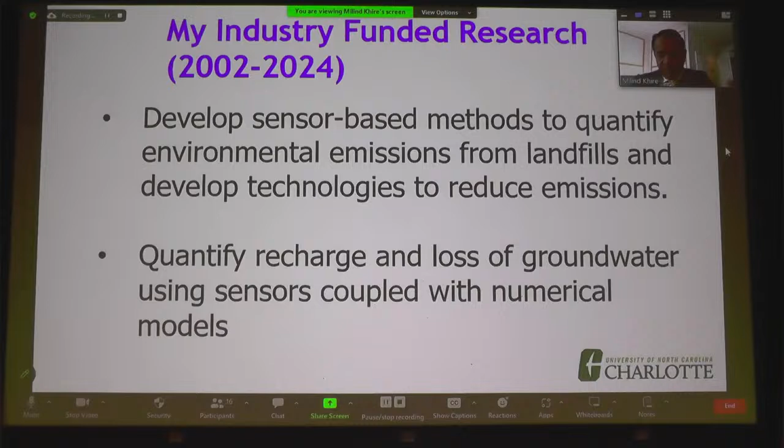I think that part needs to be handled very much by experts, and we need to train these experts. We need to have students learn about these techniques. So that's kind of the mission of my talk today: how can we use this presentation to go back to the classroom and produce more experts.

When I look at India, and when I see a lot of Indians who immigrate to Europe as well as the United States, because I'm at a conference with a lot of Indians coming from Europe as well as from other countries, the first thing I see the profession they dominate is IT, the technology. It's software related.

When I'm in India, of course I notice IT, but I also notice physical infrastructure related work, roads and bridges and anything above ground. What I think we need definitely is more environmental driven career interest. I think there are opportunities, it's just the opportunities have not been taken up, or I'm not really sure. But we need to generate more passion for careers in environment, which is equally challenging, equally could be lucrative, because there is so much room for improvement.

So if we can achieve that over time, I think I would have served my purpose. That's what at least I believe my vision is. So with that, I'm going to present some data to you related to waste and water issues in India and in the world, and hopefully you can take maybe 2 or 3 points out of my presentation and go back and motivate the people you need to motivate and do your job.

As you may have seen, a lot of my expertise developed with landfills, and landfills is the interface of air and groundwater. In that process, I have learned a lot about what we need to do and what the challenges are. Just to put the numbers, India has about 1 billion people, which generate 62 million tons of waste every year. These are annual numbers.

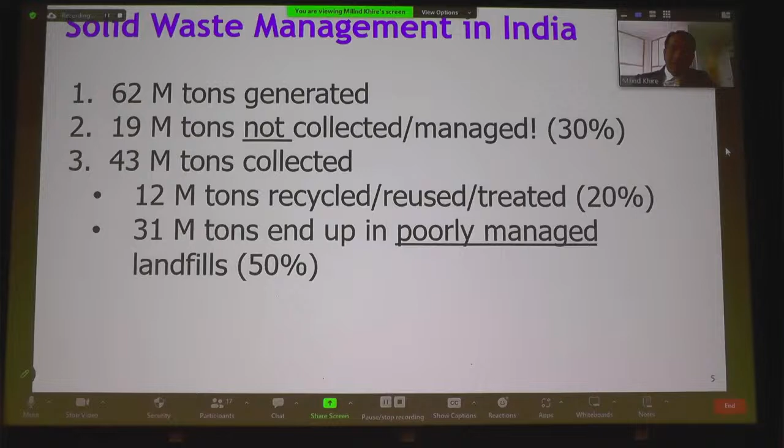So just to put in perspective, that's almost 50% of the garbage for which we have few landfills. India has few engineered landfills. I was involved in the design of the Mumbai landfill, that was almost 15 years ago now, a very small landfill compared to the size of Mumbai. I have had no involvement in other cities, but there are about 10 landfills in India which are lined landfills, which have similarity with US landfills, which is a very small number of landfills, by the way.

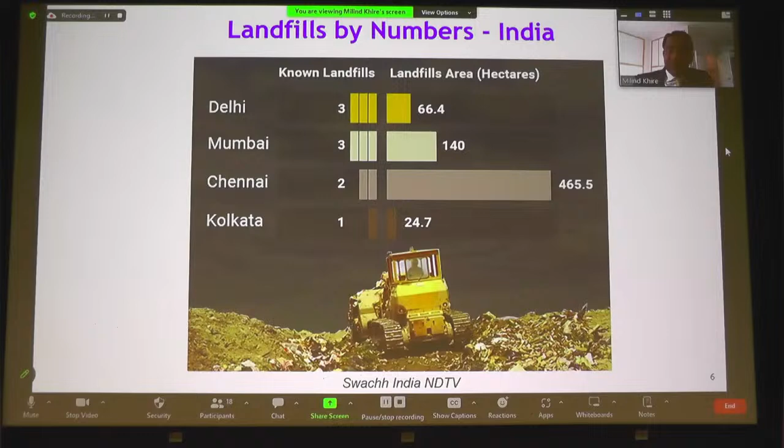When you think about it, I'm going to put some numbers in perspective for you to understand. 10 landfills, that's too little, because there is probably another 100 dumps which are not landfills, which are impacting the groundwater and the air in India over the last few decades. And if we don't improve that, it's going to keep impacting the water and air in India.

Just to put in perspective, like I said, India has 60 million tons of garbage generation, while the US generates about 300 million tons. About 50% of that goes to landfill in the US, about the same here, 50% goes to landfills in India. But as I said, only 9 or 10 landfills are engineered, the remaining are dumps. In the US, there are about 1,000 engineered landfills, so that 150 million tons goes to about 1,000 landfills.

In India, 32 million tons goes to 10 engineered landfills and many dumps. So if I were to proportionate this, India needs about 200 engineered landfills. Now I know if India has more recycling, you don't need 200, but maybe you need 100. But India is at least short by 90 landfills, if not more, to manage the waste so it doesn't end up in the groundwater, and so the contaminants do not end up in the groundwater and the gas emissions are not uncontrolled. This puts in perspective, hopefully, the need for how much expertise is needed in the arena of waste management in India. This is where some of the decision-making process could be done with the expertise of all the disciplines, including AI.

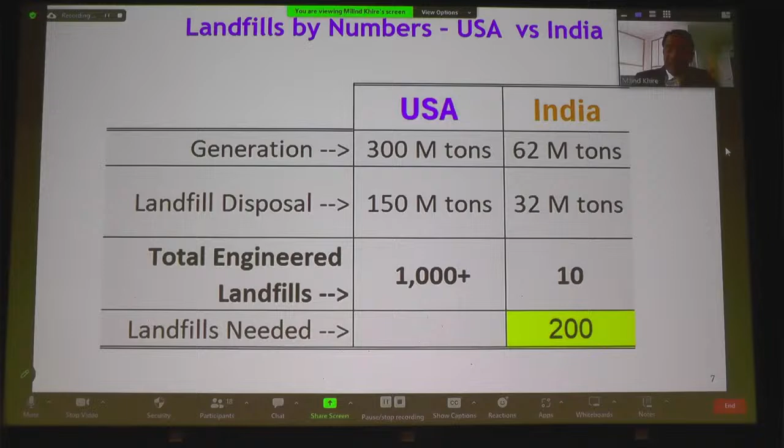For example, you may have seen in the news, Ghazipur landfill in Delhi, and there are landfills like this. These are actually dumps, not engineered landfills. They are on fire, because the waste is put in a dump which is not compacted. When waste is exposed to oxygen, it decomposes in the presence of oxygen and produces a lot of heat. If it is managed properly by compaction and proper controls of covering the waste, this would not happen.

The problem here is air pollution. There's a lot of plastic, a lot of metal, all sorts of streams of contaminants released to the air, and it's a hazard for health. It's a serious hazard, and I think this is what needs to motivate students to pursue careers in environmental engineering, where there are funds and substantial opportunities in India.

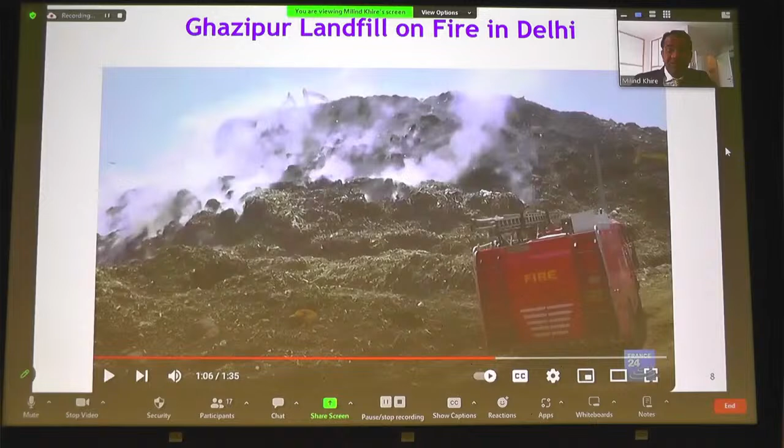This is an uncontrolled dump, and this kind of thing exists in different parts of the world, not just India. But India definitely, with the population growth and relatively few engineered landfills and a waste management collection infrastructure in place, this challenge, if not managed now, could become even much more high risk for health.

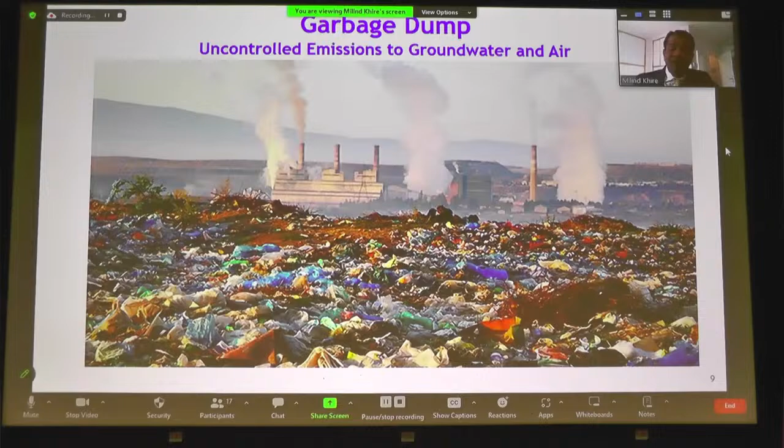It will increase the healthcare costs in India. It will decrease the productivity for Indians. And I think this must be one of the top agendas in all universities in India, where presentations are made to students, especially in the first year, to motivate them to pursue careers which are diverse, since their interests are diverse and not focused and skewed towards a single or two disciplines.

So how do we do this sustainable management in India? What do we do? Well, in many countries there are all sorts of waste separation. I know in India also there are some cities doing this, where waste is separated at the household level, because once waste is mixed and goes to any facility, it's very hard to separate. Like I'm in Poland right now, and there are 6 garbage bins here to separate all sorts of different plastics, different glass, different metal, food waste, paper waste.

Now I know that 6 may be unmanageable for certain countries. Even in the United States, in most cities, even including where I live in North Carolina, we only have 2 garbage bins: one for garbage which is not recyclable, and one for recyclable, which is paper, plastic, metal, everything all in one container, and that is picked up separately. I know Germany has almost 8 different bins. Japan has a number of them.

For India, I think we should at least need 3 garbage bins at household separation: recyclable materials, then biodegradable material which is food waste and can be composted, and stuff which cannot be recycled or is not biodegradable goes to an engineered landfill. This will reduce the amount of waste going to landfills and being scattered in the environment. So 3 different bins, and I believe some of this is happening already in Bangalore and other cities.

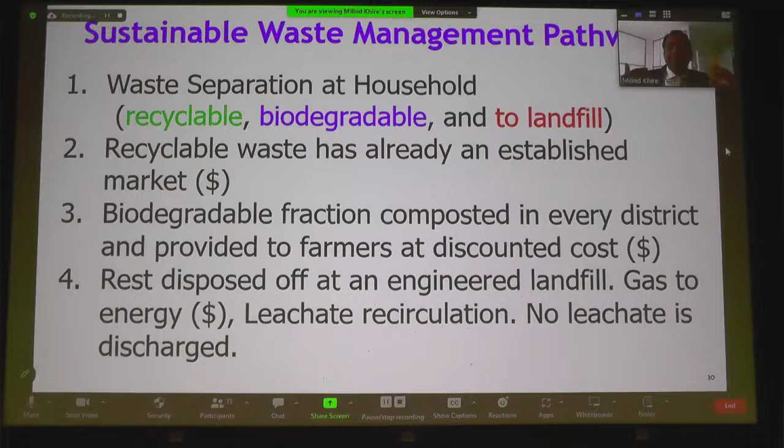In fact, even plastic going to landfills will eventually have to be excavated, because we'll be running out of plastic at some point on Earth, just as we run out of oil. So the value of plastic is going to go up, and plastic buried in landfills will be mined and become a valuable resource. So it's really important to have that resource packed in certain places, not scattered all over, so you can retrieve it and convert it—monetize it.

What are engineered landfills? I know GMIT has environmental classes offered, and I'm not exactly sure how much focus is on landfills, but I thought I'd give a quick introduction, so those from other disciplines can see elements that could be covered in their engineering classes. It's really important to develop the next level of expertise in India, able to design landfills and look at the environmental emissions—that expertise needs to be enhanced by distributing that knowledge to students.

A typical engineered landfill has a lining system at the bottom, and the waste is compacted—not just loosely placed—so air cannot enter the landfill to create heat. That's what you see with landfills on fire in Delhi, Hyderabad, and some other areas. If you place the garbage and compact it, you're using that footprint very wisely, enhancing the life of the landfill. When you compact it, you get significant life from that footprint.

Landfills also have gas collection systems and leachate collection systems, and the liner is relatively impermeable—not perfectly impermeable—which prevents contaminants from the waste going into groundwater. The gas collected from decomposition of garbage is almost 50% methane, which is a fuel, a hydrocarbon, and 50% CO2. When methane is burnt, you still get CO2 emissions, but it's a lot better than releasing methane straight to atmosphere, since methane is a highly potent greenhouse gas. Converting methane into energy is actually a resource—a revenue source.

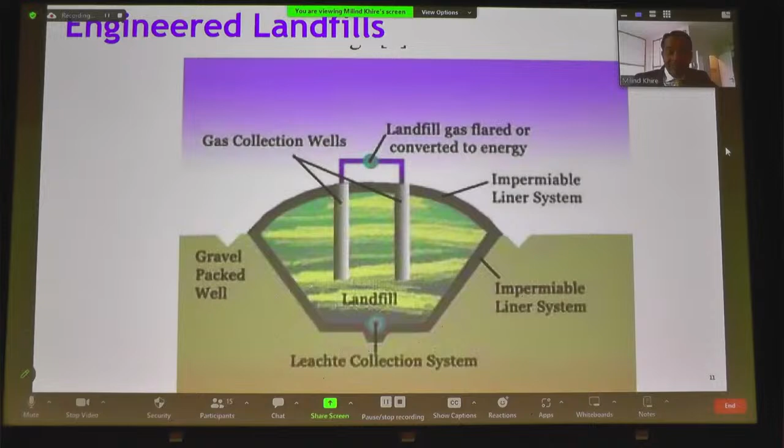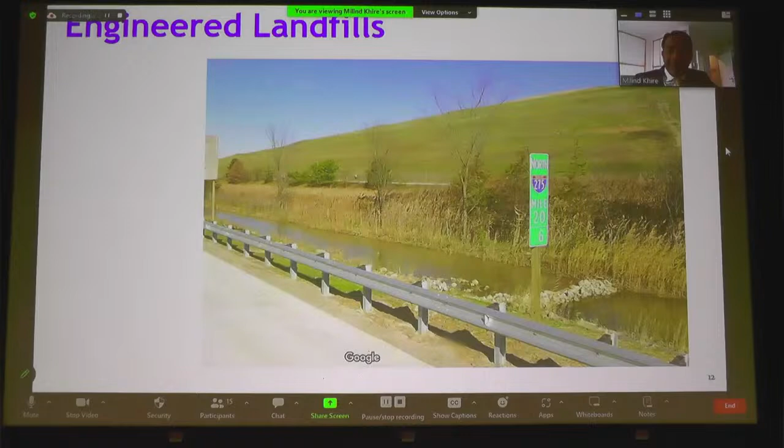This is a model landfill in the US, one of my research sites, located in the Austin, Texas area. So what does this landfill have? Well, it has a liner, which has clay and a geomembrane, which is a geosynthetic material.

Landfills usually have compacted waste with slopes that are not too steep. None of the dumps in India which I visited follow this—they can be very risky because the slopes are so steep. These landfills have had cases of sliding and people dying in the neighborhood because the landfills are huge. If they're not properly compacted and slopes aren't managed, this can be a hazard with slope stability problems, where the whole garbage basically caves into surrounding areas.

Teaching landfill engineering takes expertise from all different disciplines—not only civil engineering, chemical engineering, and environmental engineering, but also land development and building information system management, because there's a whole architecture around the landfill.

Landfills usually reach heights of 200 to 400 feet if properly managed, and this can be very safe. Some of the landfills I designed in the United States are almost 600 feet high in California, supporting big cities like San Francisco. In Florida they support cities like West Palm Beach and Miami, so these landfills can be very big.

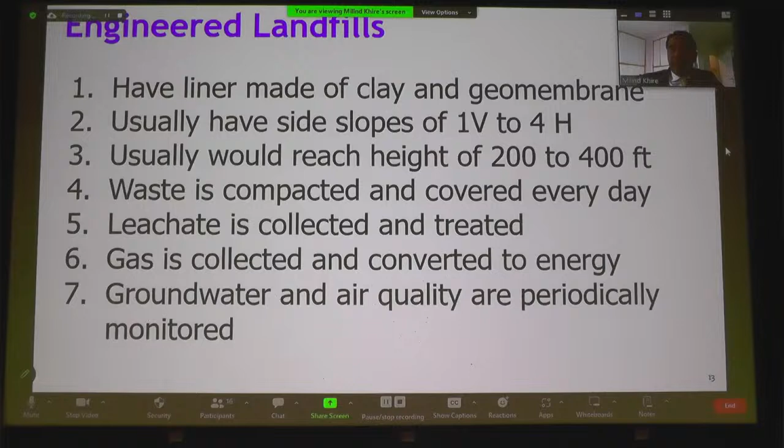At the end of that, when you have proper engineered landfills, you're protecting the groundwater, protecting the air quality, and making sure it stays protected by monitoring it. So there's a lot that goes into engineered landfills.

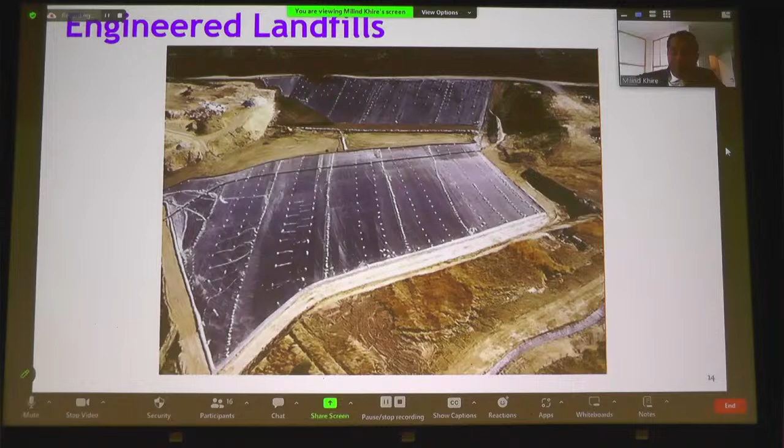As you saw, 30% of waste is not collected right now, and almost 90% goes to dumps instead of engineered landfills. This gives you an idea of a big landfill near the Los Angeles area—one of the biggest landfills in the US. Here you can see an exposed plastic liner, and the garbage trucks. This landfill is huge.

I don't know how many hectares this landfill is, but this is 10 times bigger than a typical average US landfill. This is a gas pipeline, you see the red arrow in the middle, that's a big pipeline, 6 foot diameter. This carries the methane and CO2 generated in the garbage to a big energy plant where it is burned, and it supplies about 100,000 households electricity every day.

This is how much electricity is produced here. These are the natural hills near the Los Angeles area. Behind that is the U.S. Air Force Base, on the other side. This is a valley between the mountains, which is filled with the engineered liner. So this is an engineered landfill at a huge scale.

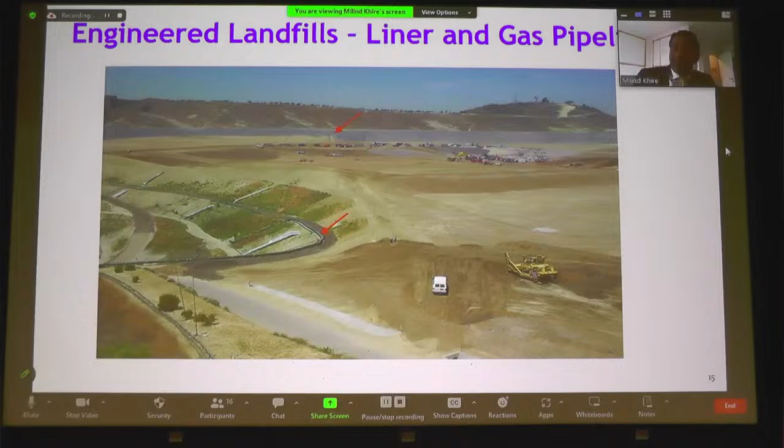Now India does not necessarily need such big landfills, but India does need more smaller engineered landfills for sure. This is a photo of a gas to energy plant, where the gas is brought in from the landfill and converted to electricity, and it can power a lot of homes nearby.

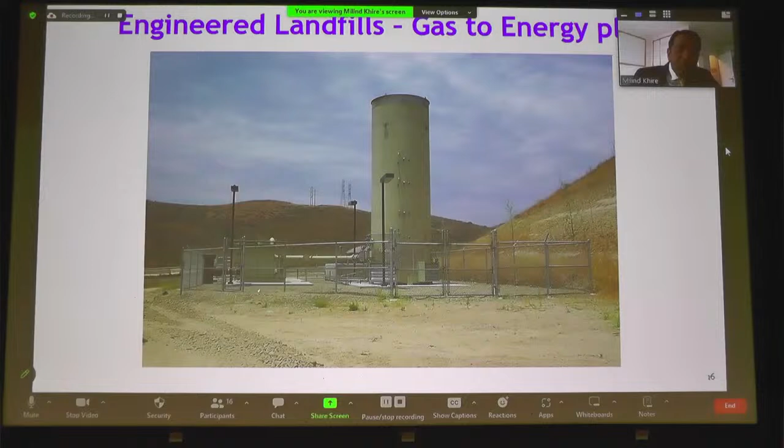And so this is really a more sustainable way of managing waste. When that gas is leaked, it is not collected, you're losing that resource, especially in terms of managing leachate from the landfills. I'm not sure, maybe I can explain this concept in a simplistic way. I know this is getting very technical for some of you who may be from fairly remote fields, but one of the things about engineered landfills is they generate leachate, and because you've got a liner, all the fluids in the garbage which contain contaminants go into the leachate.

That leachate cannot be just discharged to a river, it has to be treated. But in India, with the weather being almost just 3 months of rain and 9 months of no rain, it's a perfect place to apply a technology called the permeable blanket, or recirculation blanket.

I designed many of these blankets, and there is no Indian patent on this. I have a US patent on this technology, but there is no patent in India, so any country can use this technology, and I encourage everybody to use it to manage leachate, because it's very easy to implement, where you can use recycled materials like glass.

This is recycled glass you see in front of you. A blanket is made on top of a landfill, and there's a pipe in the middle, and the leachate produced in the landfill is injected back into this permeable layer, which in this case is made up of glass, because glass is very cheap in the US. Once it is recycled and crushed, it has very little value, so it is brought to the landfill and put in a layer, and the leachate is pumped back into this layer.

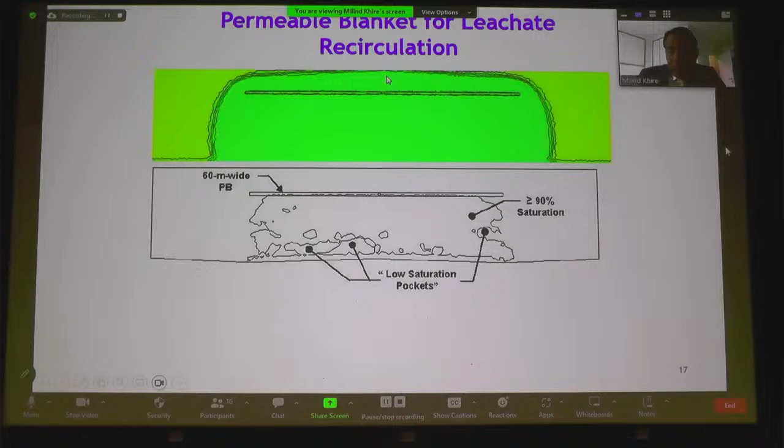So by injecting that, you're distributing the leachate in the landfill, and you are causing more gas generation, which generates more energy, and the garbage settles more easily. When it settles, you create more room in the landfill, so the life of the landfill is increased. That means you can have more waste in the landfill, so in that same footprint, you can pack a lot more waste and reduce the emissions substantially.

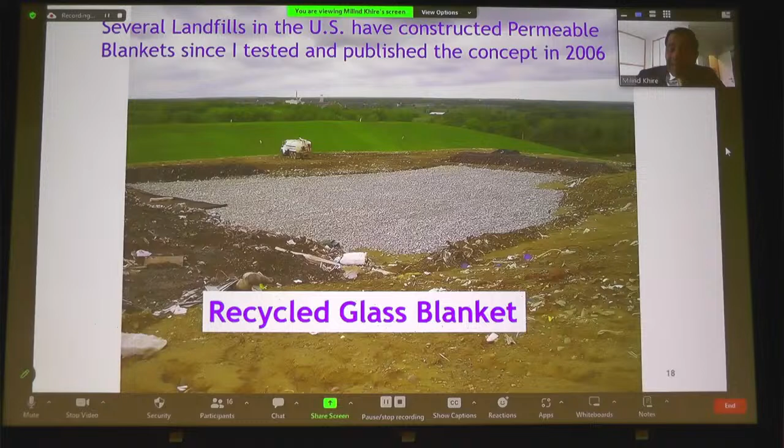So this is a recycled glass blanket. There is a lot of potential in Indian landfills to use this technology, so not a single drop of leachate has to be treated elsewhere, it just goes back into the landfill and converts into gas, and that can decrease the cost.

So my technology allows that blanket to be generated out of these shredded tires, and you inject leachate back into the landfill, and you spread it very uniformly, and you can collect the gas from this blanket also at the same time, enhancing the gas collection efficiency and reducing the emissions of this gas from landfills.

So you have the technology right in front of you, which can be implemented at a relatively cheap cost to decrease the emissions. This is another photo of one of the blankets I built when I tested my patented concept. You can see the wires here. There are sensors in this blanket and in the landfill to test the hypothesis I had developed at that point, that this blanket idea is way better than other conventional methods.

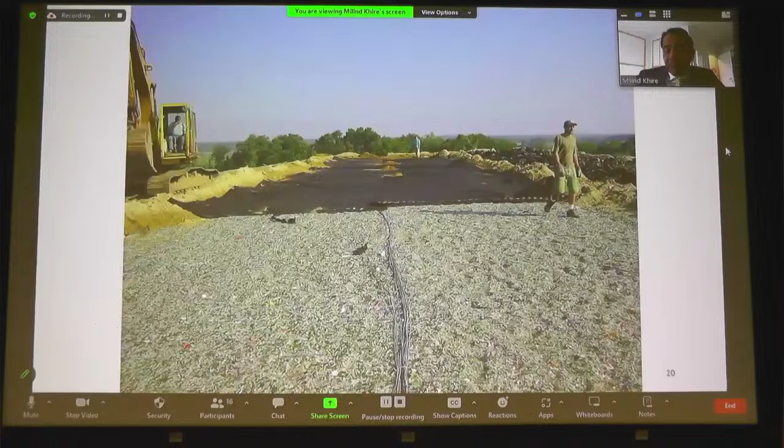And this was a test bed at that time. This is a very old photo. All of the photos I showed you, these are actual technology being implemented at landfills where you don't need sensors to do that anymore because it's proved that it works.

So the concept is really taking the leachate which is generated at the bottom of the landfill, putting it back into the landfill to enhance gas generation. And this leachate, because India is so dry for 9 months, you're going to have very little leachate generation if you manage it by recycling back in the landfill. So this will prevent contamination of the rivers, the streams, the creeks, where the leachate ends up in the landfills.

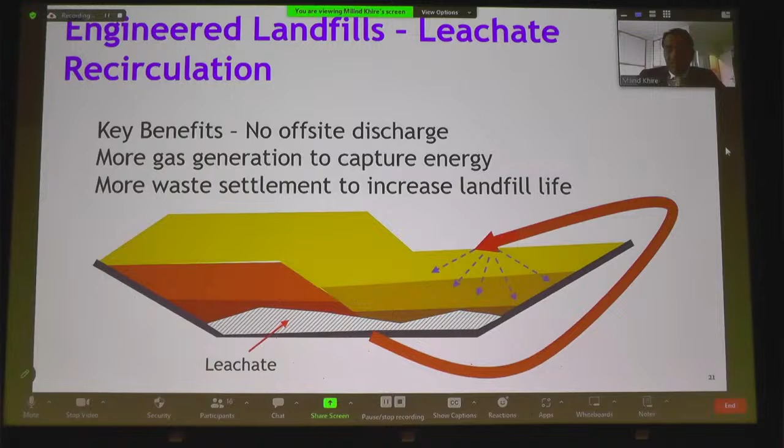And this is really, I think, something that could be taught in the classroom to students to broaden the participation of students in this type of technology.

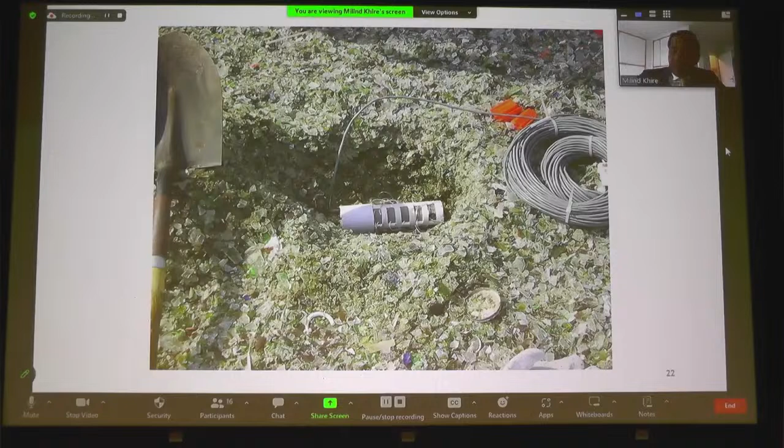This is just a photo of the blanket which I showed you with sensors. Now, the reason I'm showing this photo to all of you is some of these technologies you can develop yourself, and you have the power of sensors in India with the computer science background students. This sensor data from the sensors can be visualized, can be managed to come up with new technologies, come up with new concepts that can be patented in India and used for sustainably managing the resources of India.

I'm going to switch gears from waste to water. When I go to India, I go to conferences. I had a couple of postdocs who came from IIT Madras recently, and they worked with me on a project where we were looking at groundwater depletion. And this project was not about India, it was really about a project in the US. But we're trying to generate a mini project in India because India definitely has a water shortage in some cities.

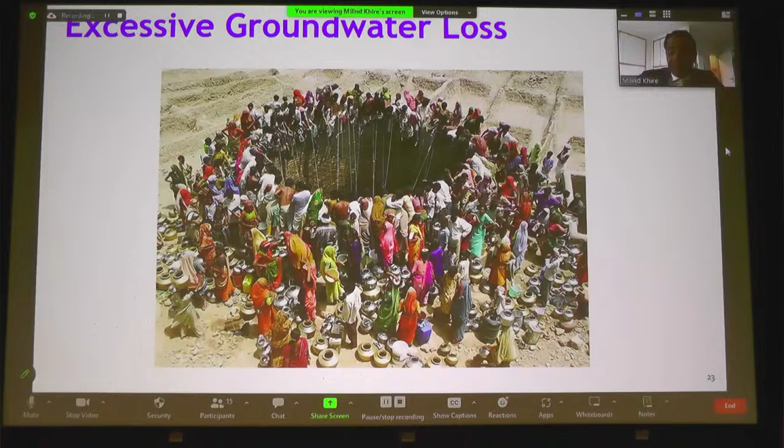Some cities have no problem. And I'm going to show you a map which will make things kind of put in perspective what is going on pretty shortly. So the picture I'm showing is not happening everywhere in India. This is an extreme heat and extreme parts of India where there are problems like this. However, this could become a common scenario in a few decades if nothing is done about understanding the groundwater loss.

What I'm referring to here is I actually looked at some data from literature and did some calculations, and I converted this into a graph. So I'm going to try to explain the graph to you. Some of the information came from a site in India, a non-profit body, and then I did some number crunching myself to look at what is going on in India.

However, remember the water in India is not going to increase. So the demand is increasing. The irrigation definitely is going to go up substantially because the loss of water during irrigation is substantial due to evaporation. Especially as the temperatures are going up, this is going to climb up very fast.

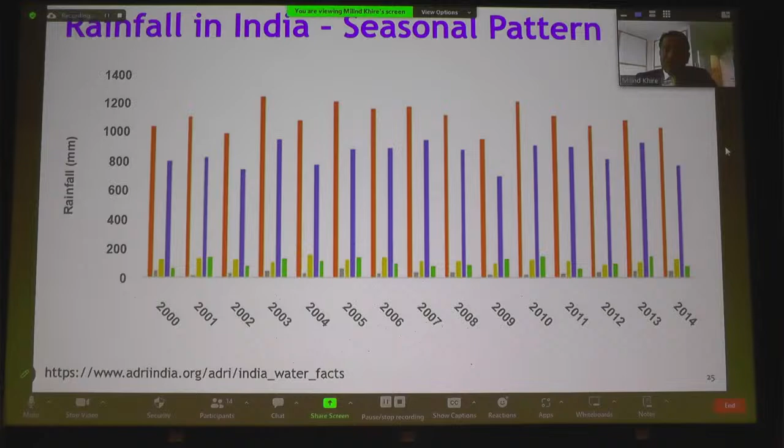So this is the challenge: you're not getting enough water, but you're going to be consuming a lot more. When you combine that, while demand is growing due to global warming, and also due to population growth, the loss of water due to evaporation is also increasing. Why is evaporation increasing? Because the air temperature is increasing. When air temperature increases, things dry up very quickly and you have to replenish it. When they irrigate the crops, they can have a lot of loss of water, meaning they have to put in more water.

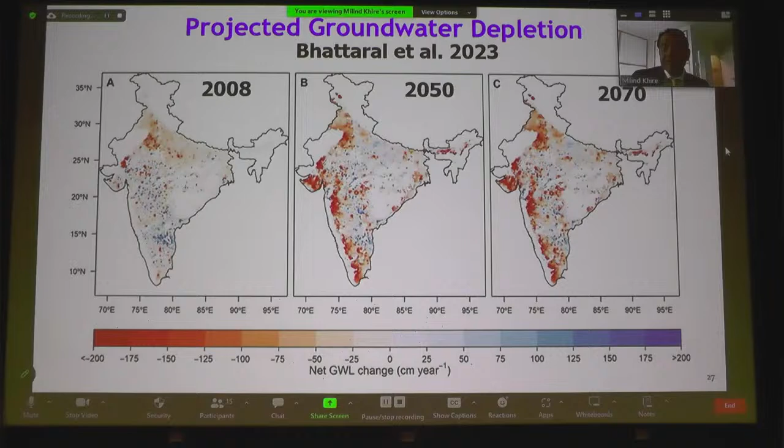That I don't think so, because that seawater is not... when the water becomes saline — I was actually in Shirdi, as you know, Dr. Prasad, and I was talking to some farmers there. Their water table is depleted so much that they're now getting salt water, and they cannot use that on their crops. The crop yield is decreasing because the well is drawing salt water. When you go too far deep, you're going to have salty water in the ground, which is of no use for irrigation as the salt concentration increases.

So what can we do about it? What is the pathway to sustainability? Well, grey water collection and reuse, that's one. A lot of the water which is consumed is not much, as you saw in the map. The irrigation is a significant portion.

And for irrigation, I know the farmers in India are already using drip irrigation. Drip irrigation technology was developed in Israel. Israel is the leading country in the world for reusing water and using every drop. Israel gets a very small amount of rainfall compared to India, but every drop is used in the farms or consumption by recycling it. And if you go to Israel, you won't feel like it's a desert — they have nice farms, beautiful farms, all sorts of fruits and vegetables growing all around the year. Very intelligently developed system. So India can do that.

I know India gets a lot more rain than Israel, and India's population is more, but if we recycle most of the water, especially the grey water, it can be used for toilets and irrigation of gardens and farms. You can save a lot of water. And the grey water will reduce the burden on the wastewater treatment plants, which if not properly operated, leak wastewater into the river. So by recycling the grey water, I think that's really the way forward.

This is where AI can be very powerful, because you can develop a pipeline network using AI, which would be the most optimum network for the highest collection and reuse.

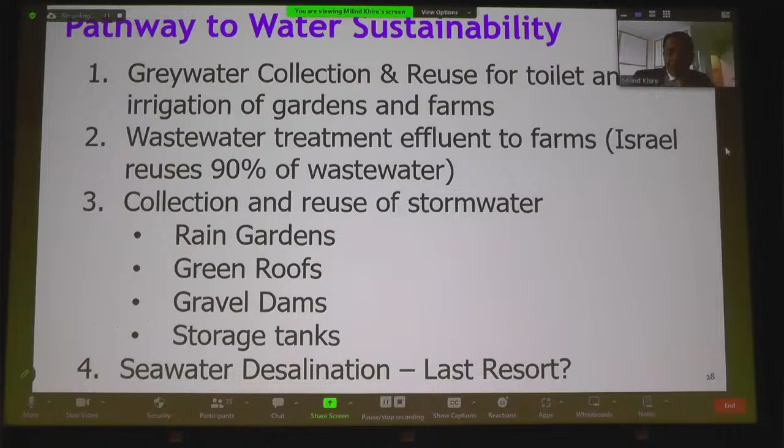So some of these technologies I'm going to rush through because I'm approaching 7:50. What time is it? Almost 10:15 there. When you're having fun, the time flies. I didn't realize I'm keeping you in your seat for 45 minutes — I just keep talking.

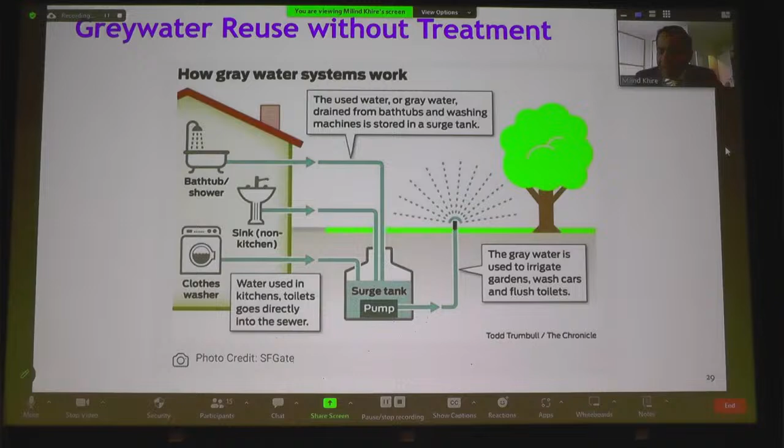So I don't know how much grey water is used in India, but grey water is basically water from our bathrooms, sinks, and clothes washing - it's not toilet water, not toilet flushing. It's only the other water, which can go into storage and be used back in the garden, or if you use a biofilter, that water can be used back in the toilet system again, since it cannot be used for drinking. You can keep recycling this water and decrease your discharge water substantially by recycling what you consume at the household level.

To me, grey water reuse is big in Israel. Even the US doesn't use any grey water yet. In some cities they are thinking about it because the US has plenty of water right now, but I think those days are numbered.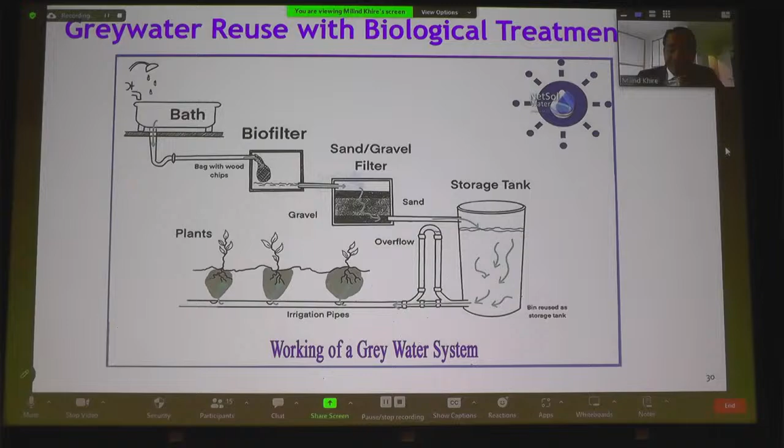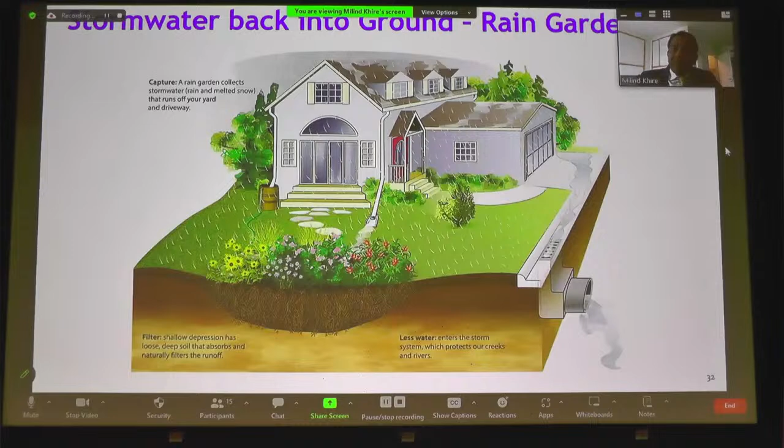Stormwater - a lot of stormwater. I know this photo is from the US. If you can store that in the ground using rain gardens, you can use this for landscapes, and you can save a lot of cost and decrease your air temperature substantially by reusing the water.

Some of these technologies - I was doing a presentation for some African countries because Africa has serious water shortage. Whenever they get rain, which is very little, there's this concept of gravel dams, building gravel storage reservoirs in the ground - you can create an aquifer in the ground. When there's rain, these gravels create storage of water, like an underground tank almost. It becomes like a natural tank where you can store the water, and then you can pump that water out over the year to use.

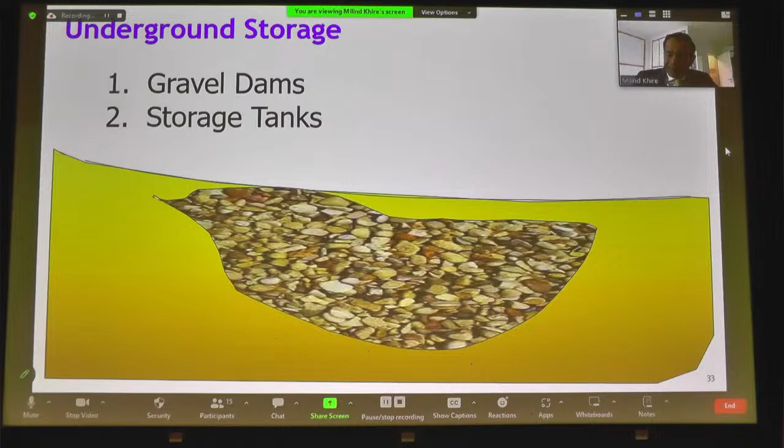A lot of times in Africa, the water just evaporates since it is not going into a storage like this, or it goes to rivers and to the ocean. They don't have the storage for it. So you've got to create storage for your rainwater near the communities where the water is landing, so it can be reused very easily.

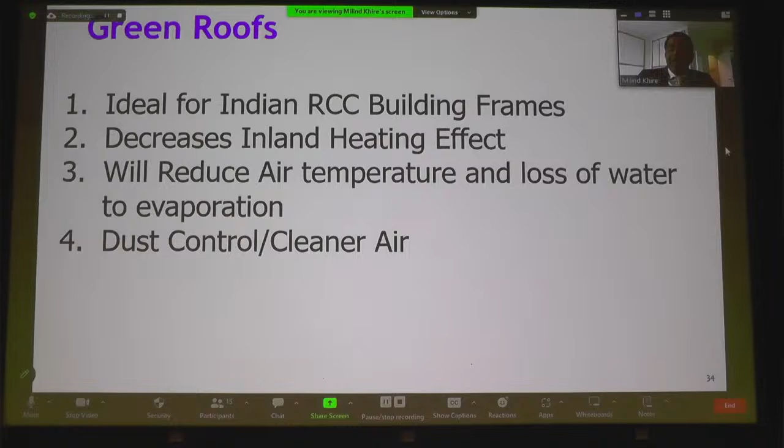Green roofs, like I talked about, should be taught in the classroom. Green roofs to me is an architectural type of knowledge that should be brought into classrooms. In India, if you go to Prestige University in Indore, they have a green roof, and I know there are several green roofs in Bangalore and other cities, but a lot of times they're only done at a commercial scale. This needs to be applied at a residential scale - a lot of apartment buildings in India need to have a green roof on top where the terrace is, so that should be built into the design of the building. These buildings will be cooler, a lot of rain can be stored, and it has a lot of positive environmental impacts.

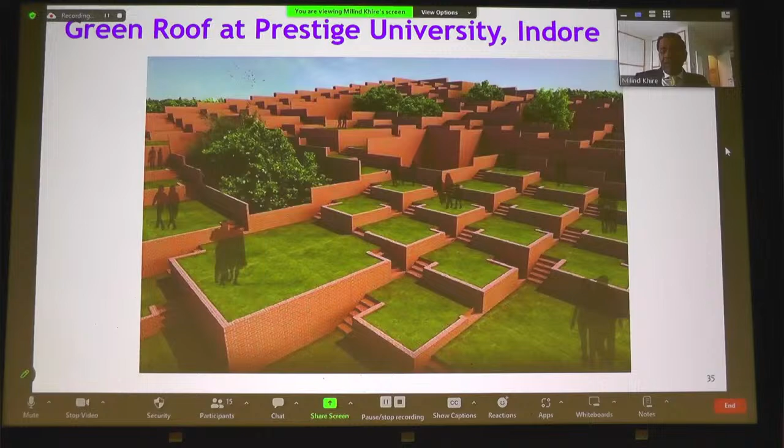So with that beautiful picture of a green roof in India, I'll end my presentation saying that the urgency for priority change is important. You all sitting in that room are the leaders - leaders in your discipline. I want you to take some of this and convert it into anything that can motivate people in your classroom, the students, or the government employees. If I can be of any help beyond this conference, just get in touch with me by email - I'm not too far to help you. But that's my vision for environmental sustainability.

So if you have any questions - I don't know how much time you have, I know you're sitting in your seat there, you probably need a break for tea or something and to stretch your legs - so I won't hold you too long. But if there are a couple of burning questions, maybe I'll try to answer those.